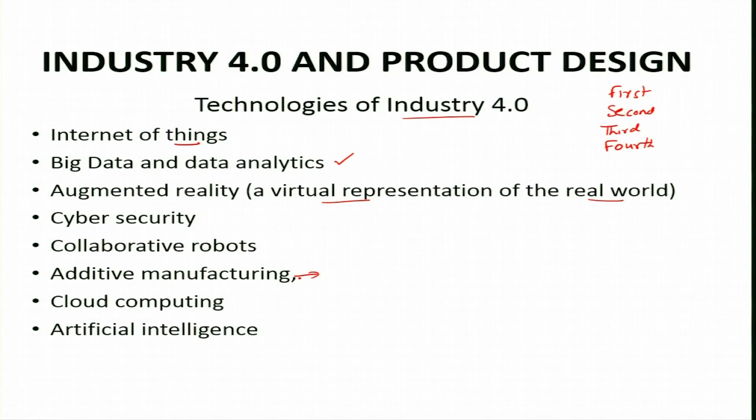So let us see this in brief. It is capable of decreasing the production cost because human interventions are not required, processes are going to be much faster, more accurate, better quality because of real time feedback given to the processes, and with the help of better analytics beyond the capabilities of human beings, the parameters are analyzed and utilized, and the logistic costs and quality management costs can also be reduced.

I can give you one example here. If you see in a steel plant, a blast furnace, where the iron ore is converted into steel - several input materials are fed into the furnace. These are natural resources, whether it is coke, coal, or iron ore, and they are not of consistent quality. Whereas the final steel we want to produce, we want a very good consistent quality steel. So what do we do?

In real time we measure the quality of these parameters, and then we can meter it also. We can change their composition, whether oxygen quantity or other ingredient quantities required, we can keep changing in a dynamic, real time manner, so that I can get a consistent steel quality. In this manner I can reduce the consumption of raw materials and get good consistent quality steel. So that is where production costs are reduced and quality management costs are also reduced, or better quality products can be produced with the help of various sensors, various analytics, etc.

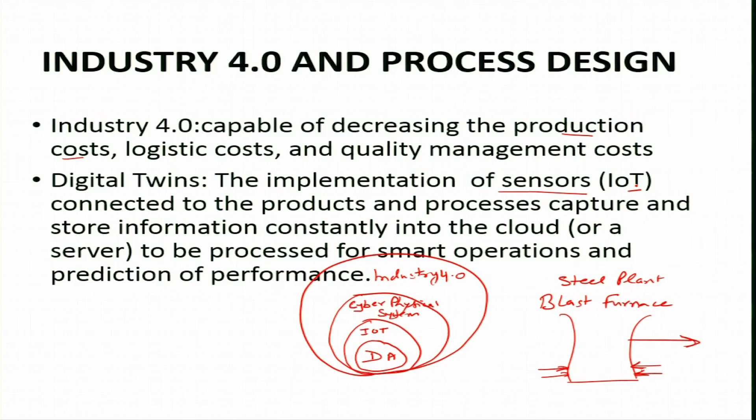Sensors and actuators in IoT - the major components are, as I said, things, and on these physical things we add sensors, so that in real time, data is collected about the performance, about its working, about its usage, etc. So a digital twin is the implementation of sensors connected to the product and processes, capturing and storing information constantly into the cloud or a server to be processed for smart operations without human intervention and prediction of performance.

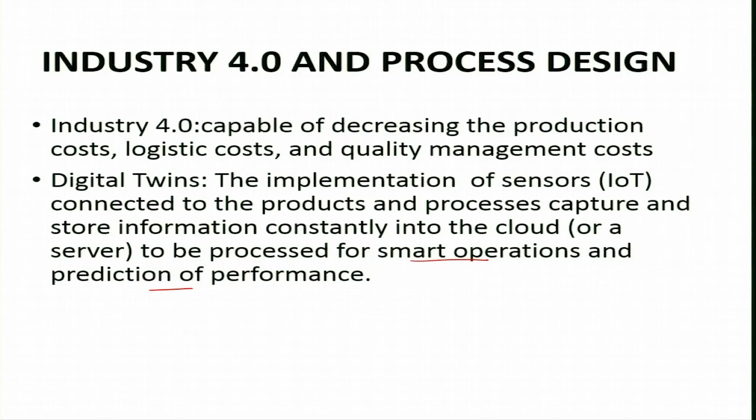So these are the things which are going to be there in our manufacturing, in designing of the products as well as in our processes. So we are going to have smart products, smart plants, and smart logistics - products performing without human intervention. Smart products means we are having so many things: smart mobiles, smart wristwatches, etc., and many more things which we will see in coming time, which do not require human intervention and give you very good performance.

So a smart product is a data processing object which has several interactive functions. A smart product combines the physical and software interface. The usage of the smart product is interactive and also requires some cognitive work by the user. You need some intellectual cognitive activities to fully utilize the smart applications, because you are not performing much, you are only using it. So whatsoever data, whatsoever information is coming, you should be able to assimilate that.

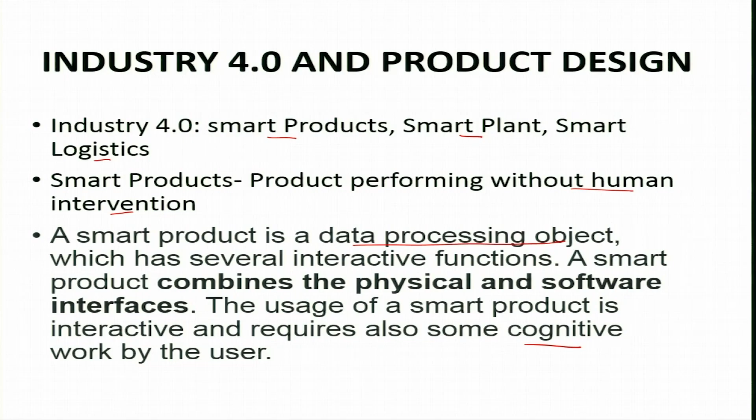Three features are very important when we talk about designing the product and processes. Autonomy - the smart products or smart processes will perform the task without the direct command of the users. They will do these activities independently, on their own, in an autonomous manner. So we have to see what type of input parameters I should give and what type of performance is expected. And we also have to keep in mind the safety of the equipment and safety of the society when we are talking about driverless cars, autonomous vehicles, unmanned aerial vehicles, etc.

We have to give very good development of these products, sensors, etc., so that accidents can be avoided or mishappenings can be avoided, and the performance is as per the expectations of the customers and users.

Second important dimension is connectivity, the connection of the product with the network, with the internet or with the cyberspace. We have to decide where to keep the sensors and how the data from the sensors is going to the cloud, what is the quality of the network, the bandwidth required, and other specifications required of the network.

Third is context awareness. We have to perceive and collect information from the surroundings also. When you are driving on a road without a driver, obviously you should be sensitive to the environment. The environmental data should also be collected, and the machine should have an awareness about the surroundings also. So in that context we have to see.

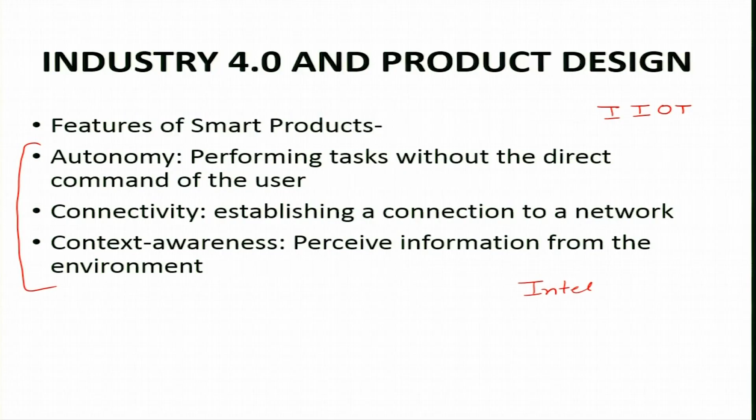So at the design stage, we now have to keep in mind, when we are designing the parts, whether it is a television, smart television, air conditioners, home appliances, or industrial products, we have to keep in mind these features, that now these technologies are going to play a very vital role in improving the performance.

Friends, in designing of products and processes, we have studied a few techniques. Value engineering is a very important technique which was developed during the Second World War. The idea here is how to improve the value of the product. Value engineering is not cost reduction. In cost reduction, we may compromise on the performance or on the functions also, whereas in value engineering we say how to achieve the same level of functions at a lower cost.

So we are not compromising on the quality, we are not compromising on the functional requirements of the product. Let us see some of the important steps in conducting a value engineering study, and at the end we will learn all the steps with the help of one example also, the example of a pencil, for which we are all aware. We understand each and every aspect of usage of the pencil as well as its manufacturing. It is such a simple product. So with the help of that we will understand the various steps of value engineering.

So friends, value engineering is an organized creative cost search technique. We search where the unnecessary cost is incurred. It is an organized technique having 8 phases, which we will study, called the value engineering job plan. It is a cost search technique for analyzing the functions.

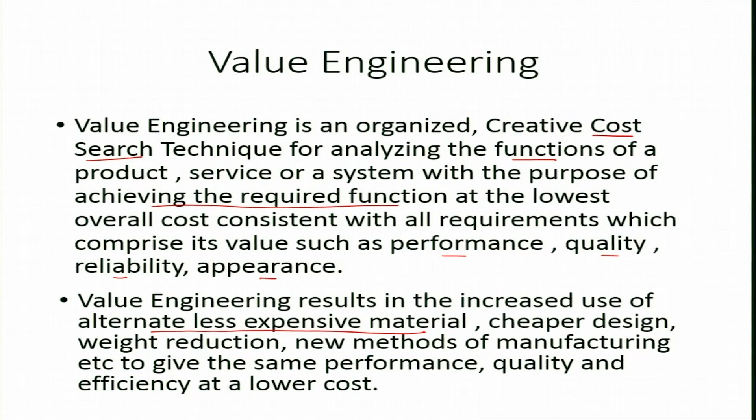Once the war was over, these value specialists were deployed in industry to improve the performance of the products and systems - to use alternate less expensive materials, cheaper designs, weight reduction, new methods of manufacturing etc., to give the same performance, quality and efficiency at a lower cost. Value engineering aims at promotion of value awareness and raising the level of professional competence and technological excellence.

Value is a function divided by cost, or worth. So we have to improve the function and we have to reduce the cost. To improve the value, we have to improve the function and reduce the cost. So the cardinal principle in value engineering is: challenge everything, challenge everything.

There is a difference between optimal and the best. In optimal, we say that within the given circumstances, within the given condition, what is best. But when you challenge everything, you are not assuming anything - you challenge, you can change everything. So in that case you get the best solutions.

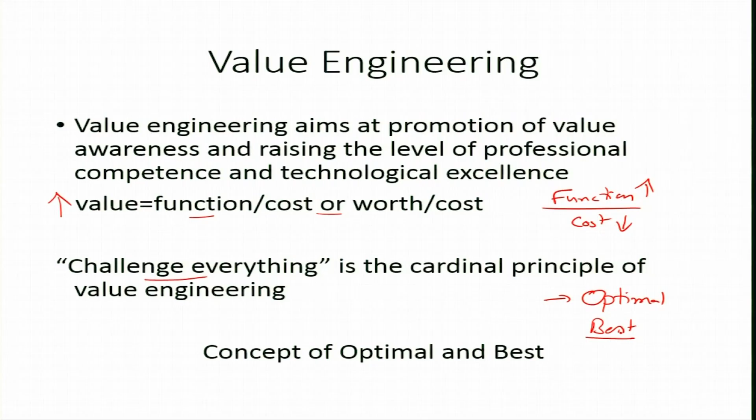So value engineering is cost avoidance instead of cost reduction. Value engineering means providing necessary functions and avoiding unnecessary functions. We see that if there is something which is not required by the customer, why have it in the product? So the first question is: why is this there in the product? If there is no function, if there is no answer why this is there...

If there is no answer, let us eliminate it. Then, maximizing value is not only achieved by reducing cost, but value can also be enhanced by improving the functions that are desired by the customer, at a relatively small increase in cost. As I said, at the productivity stage also, we are saying value equals function over cost.

So there are 4 ways by which we can increase the value. One is increasing the function at the same cost. Second is same function and reducing the cost. Third is increasing the function as well as reducing the cost. Fourth is a large increase in functional value with a small increase in cost. So in that manner we can do improvement in the value - all 4 kinds of things are applied in improving the value in value engineering cases.

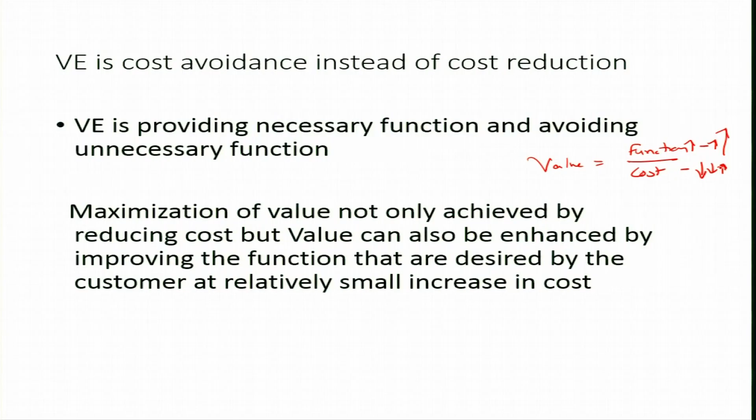So the objective is to identify the customer needs. All design steps start with customer needs, and customer needs are expressed in terms of function, not in terms of product. I will say that if I design a pencil, I will not say I have to design a pencil - I have to design a product which fulfills a function which is called 'make mark'. The function of the pencil is make mark. So I want to design a product which achieves this function of make mark, like that.

Similarly, for a tumbler, the idea is to hold liquid or hold material. So any product which can hold material, hold liquid, is a good product. So we have to see what is the basic function of a particular product.

So, find out the function and their cost. In a given product, we will see what functions this product is performing and at what cost these functions are achieved. Then identify the high cost functions - the functions which are having high cost but whose value is less - we identify that, and then we create the alternatives.

In the creative phase, we create the alternatives, so that for the high cost, low value function, we create alternatives. We will see this in examples also. And then we select the most valuable alternative for implementation, obviously after thorough analysis. And what are the benefits?

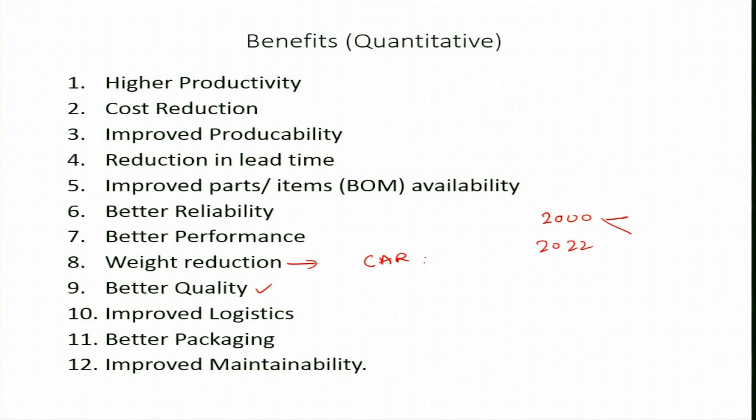Now the difference between value engineering and cost reduction. The conventional cost reduction program is more item oriented, tends to follow past practices, is analytical in approach, so there are no breakthrough changes—whatever you are doing, they try small changes within that itself. Ideas are convergent, cost visibility is part wise rather than function wise or process wise, and it is usually individual oriented work.

Whereas in value engineering, the approach is not item oriented but function oriented—we want to achieve the function, since the product is meant to fulfill a certain function. It applies an innovative approach rather than following trends; you don't accept anything existing, you challenge everything. So exercise maximum creativity, no holds barred. It's a divergent-convergent idea: first we try to diverge, creating as many ideas as possible, then we start converging them together to lead to the final answer, the final product.

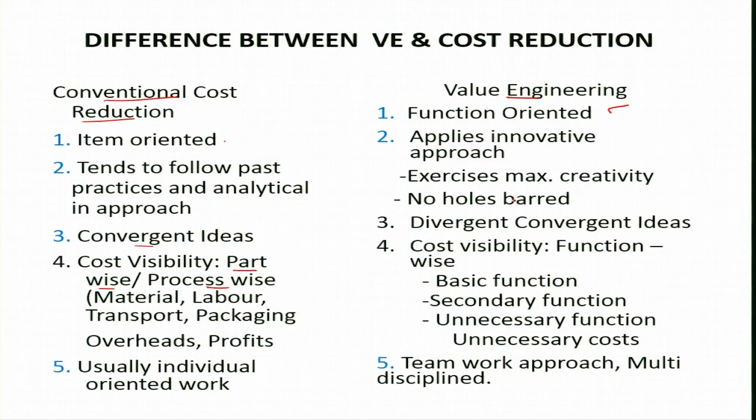Cost visibility is in the form of function—basic functions, primary functions, secondary functions, and unnecessary functions—and I try to see the unnecessary cost by identifying the unnecessary functions. It is a teamwork approach, a multidisciplinary approach, where team members come from several areas: marketing, research and development, product development, manufacturing, production, procurement, and costing people are also part of this team. Now let us see some small definitions.

Value is the lowest possible cost of a product or service performing a useful and essential function with required quality and reliability. Value is defined as needed performance at minimum cost. So value is nothing but...

what we say in our daily parlance—the value proposition for me. What is the value proposition for me for a particular product or offer? How it is going to perform for me and at what cost I am going to get that—that is called value proposition. So what is the value for me of a given idea, a given product, why should I have it?

This value has several types; only 3 are listed here. One is use value—what makes it work. Esteem value—what makes it sell, just like jewelry or ornaments have more esteem value and less use value, whereas turbines, fans, etc. have more use value and less esteem value. And then there is exchange value—at what price one can trade for it.

And then the second important thing which we have to see is what is the worth of that item for me. The monetary equivalent for every type of resource being expended or expected in order to achieve a single function or a group of functions together, making up a project designed to satisfy the specific needs of the customer. So worth is what is the money equivalent to that? What is the worth of that to me?

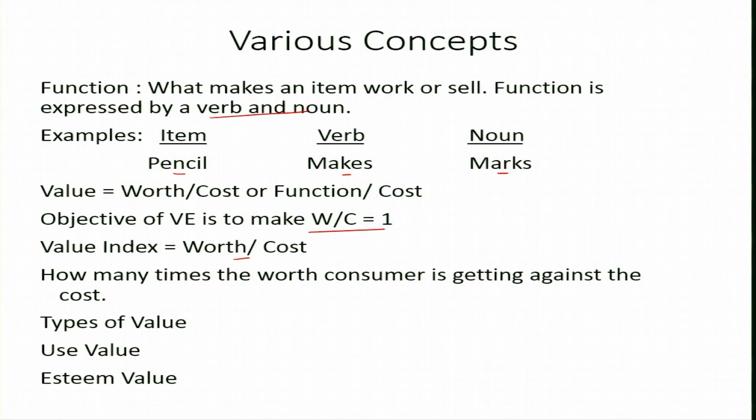What happens if you apply it at a later stage, the cost of implementation is high and the benefits are also very less, because at the operation stage so many changes you need to make, already you have committed something. So the cost of change is very high and there may be several things which you may not be able to change to get the full advantage of value engineering.

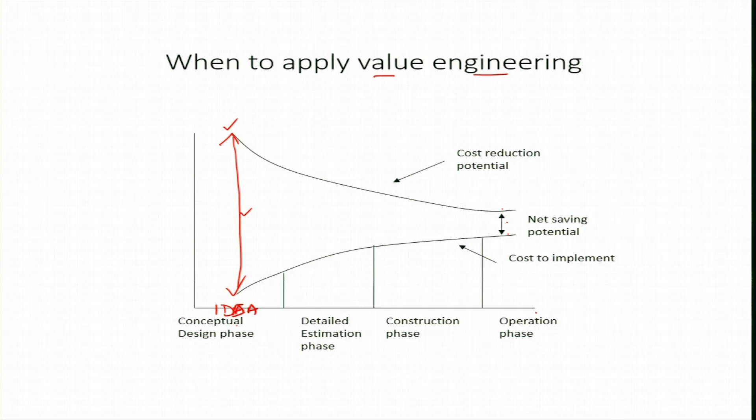As I said, it was developed during the Second World War. Due to scarcity of raw materials, value analysis teams were formed to search for alternate ways to achieve a given purpose or function. There are alternate names: value analysis, value engineering, value management, etc.

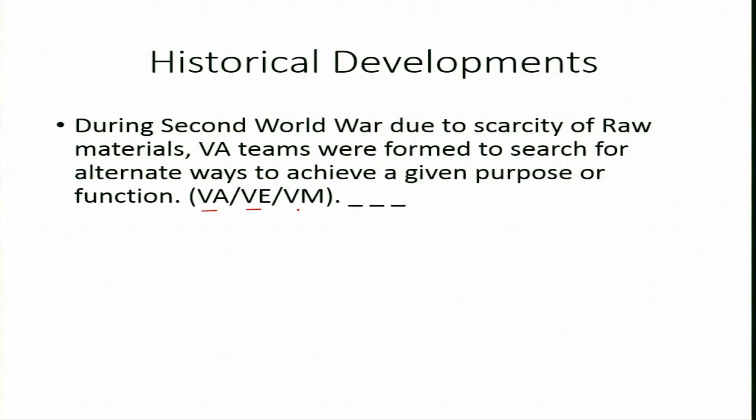It uses a systematic job plan. The job plan outlines the specific steps, 8 steps are there, to effectively analyze a product or service in order to develop the maximum number of alternatives to achieve the product's or service's required functions.

The phases: orientation phase, information phase, function phase, we will see them in detail in coming slides. Creativity phase, analytical phase, whatever we have created, we analyze that, evaluate the alternatives and then we recommend to the management, recommend to the seniors, and then implementation. So this way 8 steps are involved in value engineering. Let us see one by one.

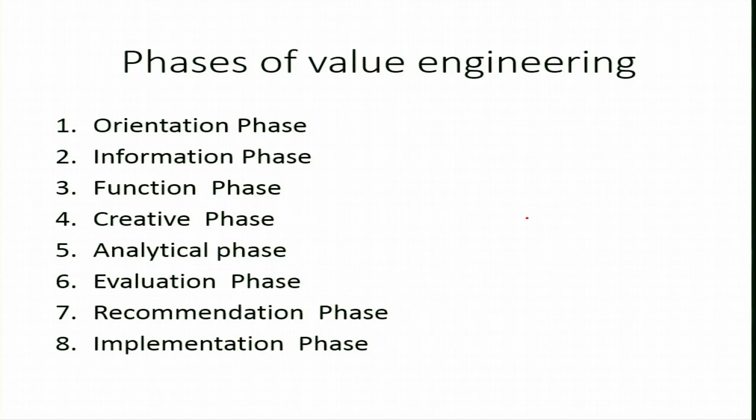First step is selection of the product or a project. Which product, which component, which part, which service, which process I should select. What is to be studied?

Submit ideas for the project. Here also you can try to find out what are the various things, generate the various projects which can be implemented, which can be studied, and out of that evaluate for potential benefit. The projects which are having high potential benefits, that may be selected, where the return on investment is high or time to implement the results is less, or there may be some other benefit.

It is a hazardous work where it may be creating environmental damages, or it can affect the safety of the worker, something like that. So that can be selected as a project. Other than economic consideration can be there in selecting the project.

Here in the orientation phase, we are also appointing the team, allocating resources, and overcoming roadblocks. There may be several roadblocks. People may say, we are using it for so many years, why change it? It is performing very well, why change it? Or there may be obstacles like, we do not have the necessary competency or resources to do that.

So we have to create the atmosphere within the organization so that there is acceptability of the project, and then set the goals, what you want to achieve, set the milestones in between, and the total project duration in which you want to achieve that. Establish the priorities and get the project approval and start it. So this is part of the orientation phase, where we are preparing the ground for systematically taking up the project.

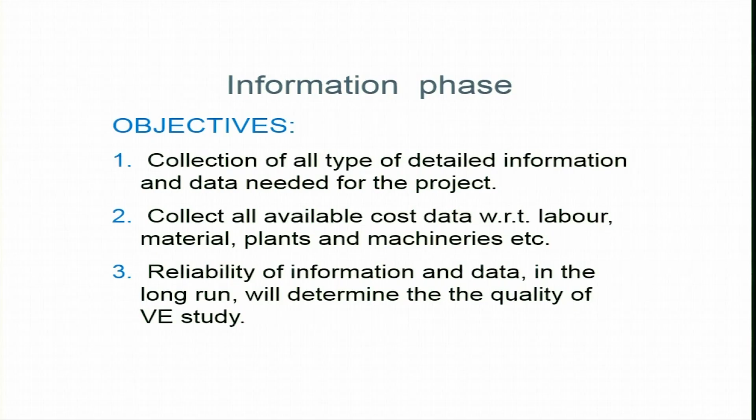We should ask key questions while collecting the data. Who made the specifications drawing and when? How old is this specification, what was the team structure, what were the constraints at that time, was it ever reviewed and revised, if so when, are the specified materials easy to get or are they specially made for us, like special material versus standard material, were alternate materials used, is there one supplier for the item?

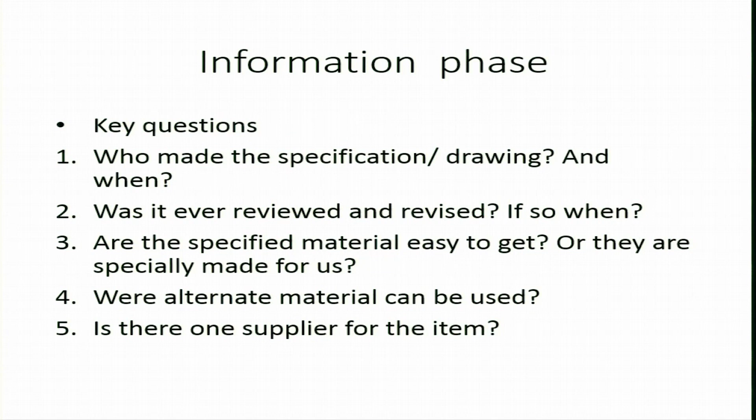So some of the questions to explore while collecting information. Were complaints ever received regarding the item? What is the history of the item? How many complaints, warranty returns, internal failures, external failures, what type of quality control checks are required.

Are the costs based on recent estimates? You may have a costing done 5 years back or 2 years back, so you should have the cost data of recent periods. Are there any hidden costs? Have we considered everybody who has anything to do with the product, so that each and every aspect, each and every cost is captured?

Which aspect of the project, in your opinion, can be greatly improved? The product may be like cars, etc. So there may be several aspects. Which aspect should be considered? There are several types of hidden costs in any system.

Certain costs are visible from outside, certain costs are not visible, like losing a customer is a hidden cost of poor quality, or there may be delays in service, or expediting with high logistic cost which may not be visible to you. So these are called hidden costs related to the product.

Then the third phase, which is the heart of value engineering, is the function phase. Function definition and analysis is the heart of the value methodology. It is the primary activity that separates value methodology from all other improvement practices. There are several such approaches available - operation research, method study, quality circles - which help in improvement. But the unique aspect of value engineering is its function approach, which makes it different from others.

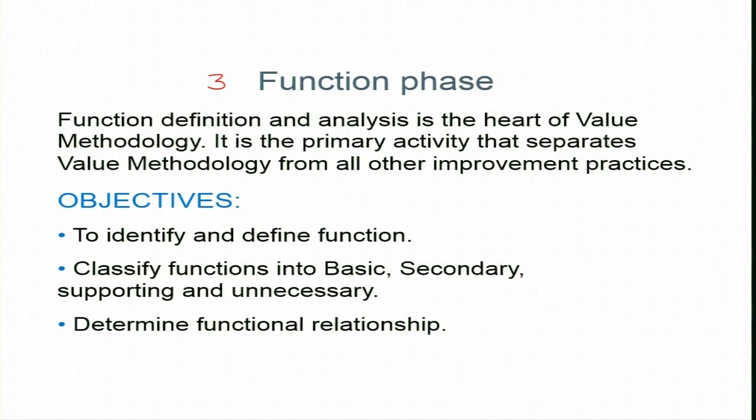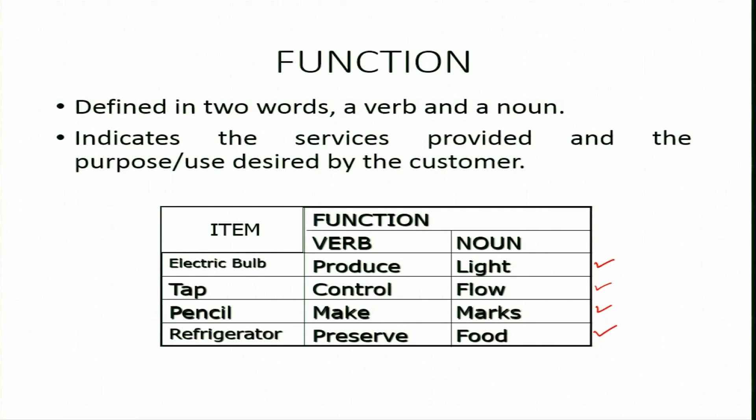So define the function with the help of two words: electric bulb - produce light; tap - control flow; pencil - make mark; refrigerator - preserve food. In that manner, any product we can define with the help of two words, a verb and a noun. Perform a cost-worth analysis of each function.

What is the cost of achieving that function, and identify the unnecessary cost. Determine value opportunity cost of each function, determine overall value opportunity cost, and determine the overall worth of the project. We will see, when doing an example of a pencil, all these steps we are going to follow very religiously there.

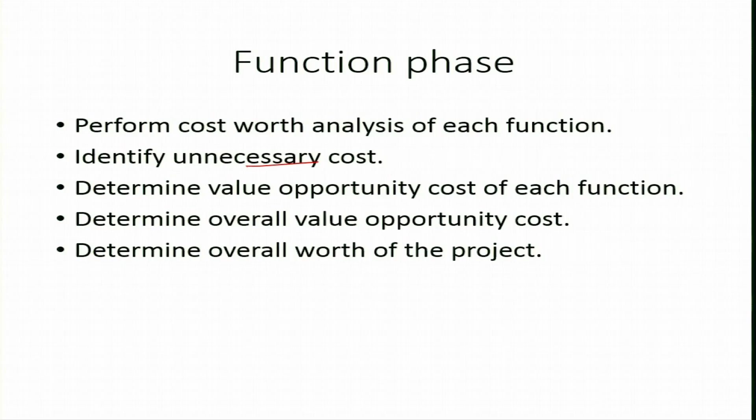So, key questions are: what does it do? If we find that there is no purpose of this, we may totally eliminate that. What must it do? So, creating the right approach, right things which is required.

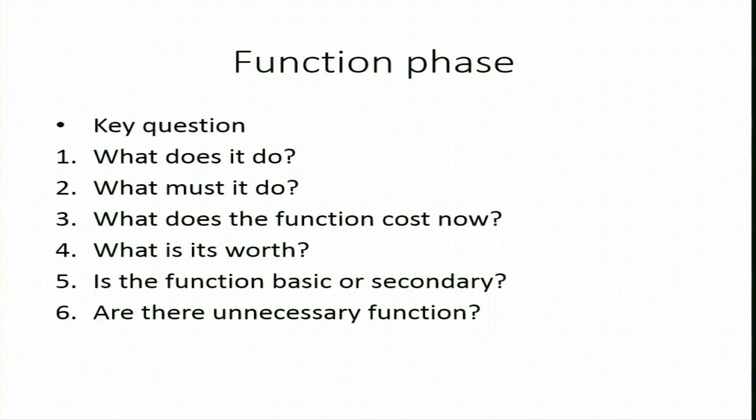What does the function cost now? What is its worth? Is the function basic or secondary? Are there unnecessary functions? So, we try to identify that. So, we classify the functions as basic functions, secondary functions, supporting functions, and unnecessary functions.

Like in LCD projector, there may be unnecessary heat created by the bulb. So, that is an unnecessary function, dissipating the heat. All such things, parts, etc., which you are using to dissipate the heat is an unnecessary function.

Secondary function may be because of certain design features, or maybe certain secondary requirements of the customer also. Supporting function can also be due to some secondary requirements of the function of the user also.

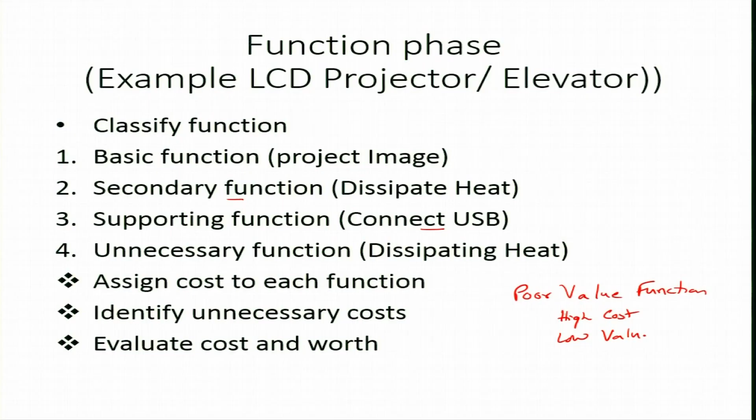Then, as I said earlier, the end of the function phase is to identify poor value functions, the functions which are having high cost and low value. So, they are called poor value functions. And then in the creativity phase, we generate the alternatives for this poor value functions.

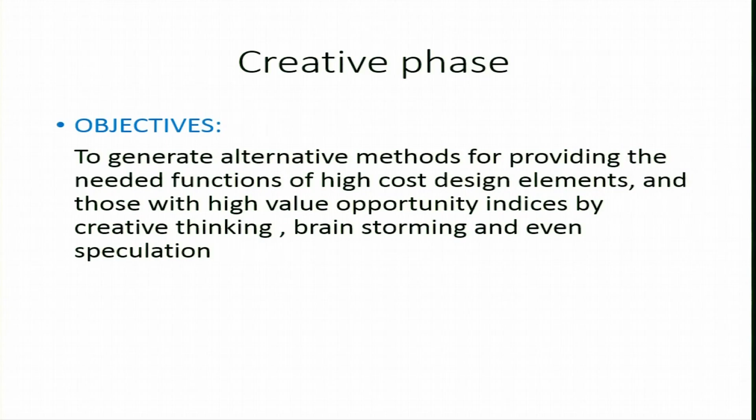By using several idea generation techniques, we generate alternative methods for providing the needed functions of high cost design elements and those with high value opportunity indices by creative thinking, brainstorming and even speculation. So, such kind of approaches can be used in the creativity phase.

So, key question is what else would accomplish the job required function, what else can be done to achieve the required function. This involves generating a large quantity of ideas. We have seen that we should generate large ideas because in screening and in analysis we found that several ideas died out and were not able to pass the test of scrutiny. So, generate large quantity of ideas for alternate means of accomplishing the basic function.

Challenge everything is the cardinal principle. There is always a better method of doing it. These are some tips for creating when our creativity is high.

Select the right time of the day when our creativity is very high. State the problem carefully and clearly. If you are not given the problem definition, articulate the problem in a proper manner, people may get different ideas and you may get ideas which are not worthwhile. Organize your approach and avoid generalities.

Use idea banks and idea museums also. There are certain ways, certain things already in archive. Build up your idea resources. Build big ideas from little ones. Set a quota for ideas.

Try the input output scheme. Talk it over and use innovative techniques. Use information from only the best source. Identify and overcome the roadblocks.

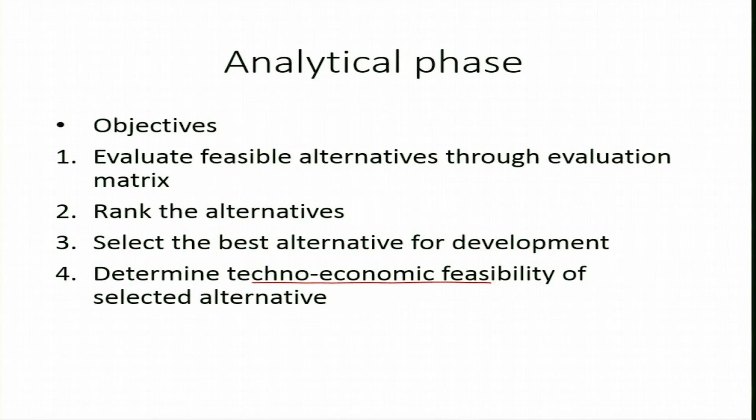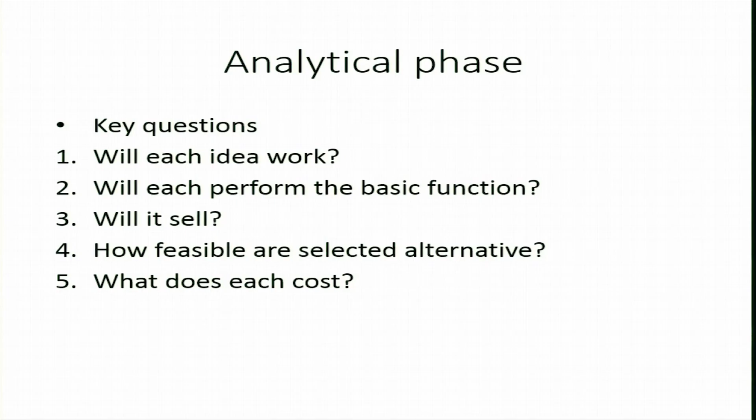Key question: will each idea work? Will each perform the basic function? Will it sell? How feasible are selected alternatives? What does each cost?

It is from this phase onward that the ideas generated are subjected to screening with function, performance, reliability, etc. The different ideas may be refined, combined, divided, modified, amplified, dropped to arrive at a final set of alternatives which will accomplish the function.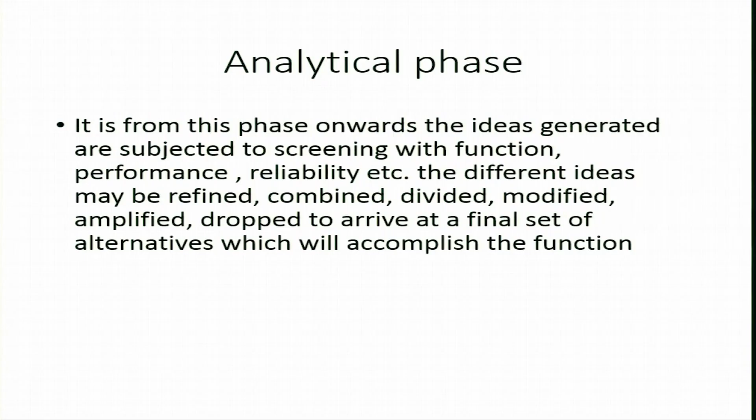Then come the evaluation phase. Put the recommended alternative vis-a-vis cost and benefits before the decision makers in such convincing terms that they will accept the recommendation, to make recommendation for the specific action and to suggest an implementation plan of action.

Key question: will the customer needs be satisfied? Will it meet all requirements? Who has to improve it? What are the implementation problems and what are the costs associated with that?

Few more questions. What are the savings potential if it works? Which is the least expensive? Will it be relatively difficult or easy to make the changes? Is there time to implement? What are the chances of

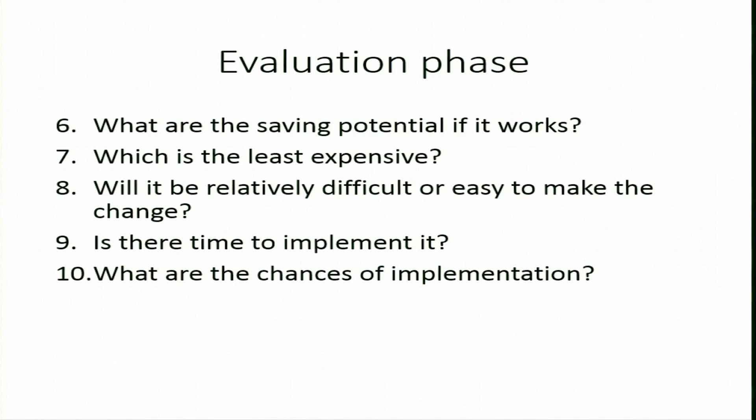implementation? Then come the recommendation phase. We recommend our proposal to the top management and we also tell them what are the cost savings, what are the resources required, how it is going to be beneficial for the organization.

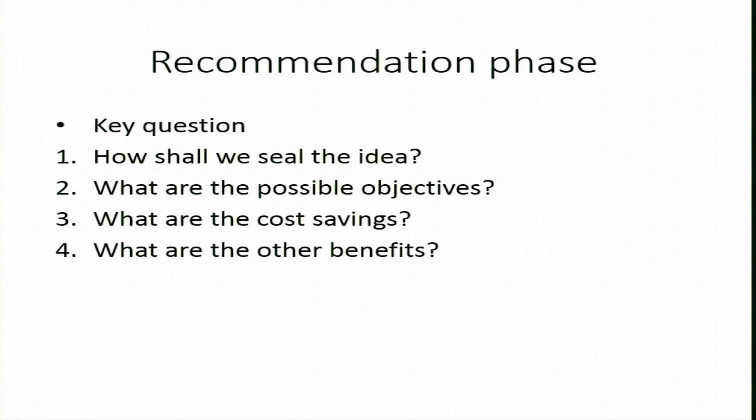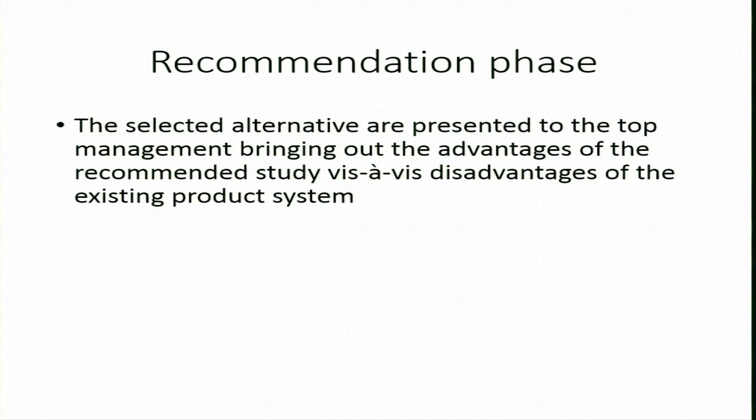And the selected alternatives are presented to the top management, bringing out the advantages of recommended study vis-a-vis disadvantages of the existing product system. And then comes the implementation phase to assure that approved proposals are quickly and properly translated into actions to achieve the savings of the product improvement that were assured. Various phases in this are implementation phase, audit phase, extension phase.

Key question: has the recommendation been fully implemented? What are the problems? What are the savings and advantages? This is the feedback from the implementation. How and who will monitor the progress? Who are responsible for implementation within the time preset?

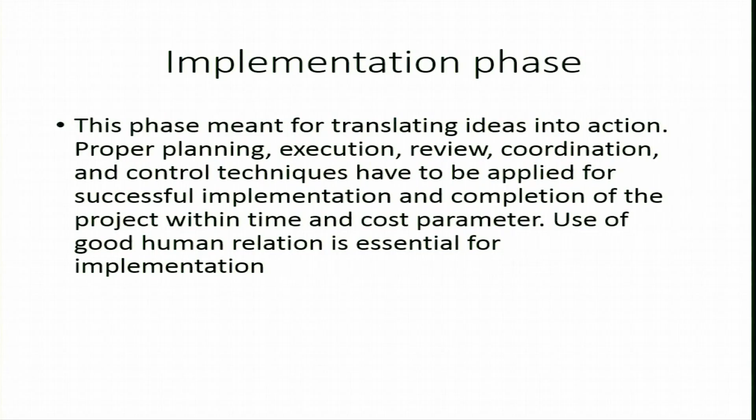This phase is meant for translating ideas into actions. Proper planning, execution, review, coordination and control techniques have to be applied for successful implementation and completion of the project within the time and cost parameters. Use of good human relations is essential for implementation.

Now let us come to the example, how to implement these 8 phases with the help of an example: pencil. Orientation phase, selection of the project.

Why in a classroom setup have we selected pencil as a case study? Because it is a very common item, everyone is familiar with it. An assorted audience from different branches can be there. The product structure and manufacturing process is simple and transparent. Everyone can understand how a pencil is manufactured, and cost visibility is also there.

Formation of the team: all the participants of the course or program can be participants, or we can form teams of 5 to 7 students or participants.

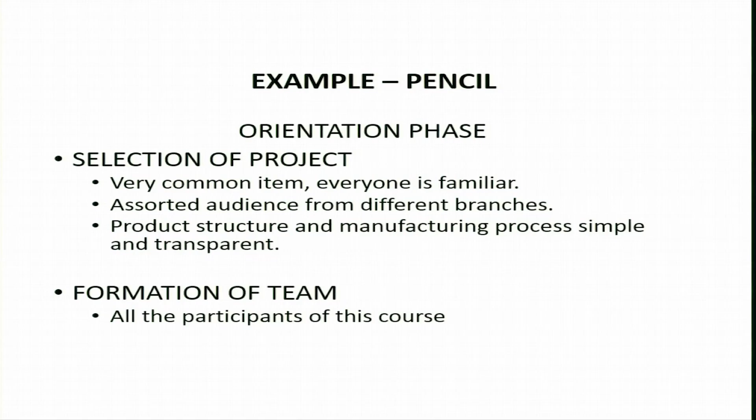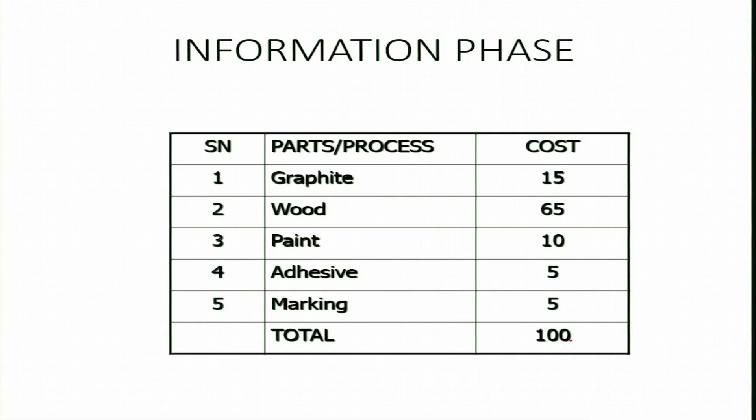Now we collect the information, the second phase of our value engineering job plan. For a pencil, let us say the pencil is of 1 rupee, or 100% cost, if we consider. Out of that, 15% cost or 15 paisa is of graphite, 65% cost is of wood, 10% cost is of paint, 5% cost is of adhesive, and 5% cost is of marking. This is the approximate breakup of the total cost we can consider.

Now let us see the functions of these materials used in each part and process. The graphite, which we popularly call lead because of its black color, is used in the pencil. The function of the graphite is Function A: make marks.

Wood is used to protect the lead, the graphite, and also provide grip. With the help of wood we get grip while writing, and the lead, being fragile, is also protected in the process.

The paint provides smoothness, so it does not injure our finger, and it also protects the wood. If the wood gets wet, it may get damaged or spoil the pencil. So the paint protects the wood as well as provides smoothness so we can easily grip it. We can also write another function: provide grip.

Adhesive provides bonding. The pencil's wooden part is made in two halves, and by keeping the circular lead in between, with the help of adhesive, it is bonded together.

Then there is marking: something written on the pencil like HB, 2H, 3H, the manufacturer's name and other things, to convey the message that this pencil is made by a particular company and is of a certain hardness - HB, 2H, 4H, or 2B - required for different applications.

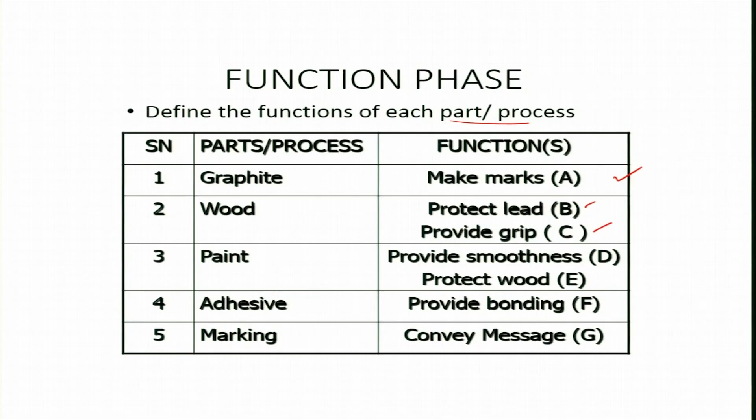Now, the next step is to compare the functions, to see which function is the most important out of the 7 functions we have identified: A, B, C, D, E, F, and G.

Now we compare these with the help of a pairwise comparison technique to see which function is most important. Here I compare A with B: whether make marks is more important, or function B, protect lead. For a pencil, is make mark more important, or protect lead more important? Obviously, make mark is more important.

So like this, I compare in a pairwise manner and then count the score. Wherever A is coming, I count the score: 3 plus 3 is 6, plus 3 is 9, 12, 15, and 7 - there's a small mistake here, let us make this A2, so the score is 17. Then for B, let us count it: 2, 4, 6, 7, 3, 10. For C the score is 1 plus 2, which is 3, wherever C is coming I am counting that.

For D the score is 2, for E the score is 2 4 plus 3 7, for F the score is 3 plus 2 5 plus 3 6 8 and 3 11, and for G my score is 0, nowhere G is coming. Okay, so like this.

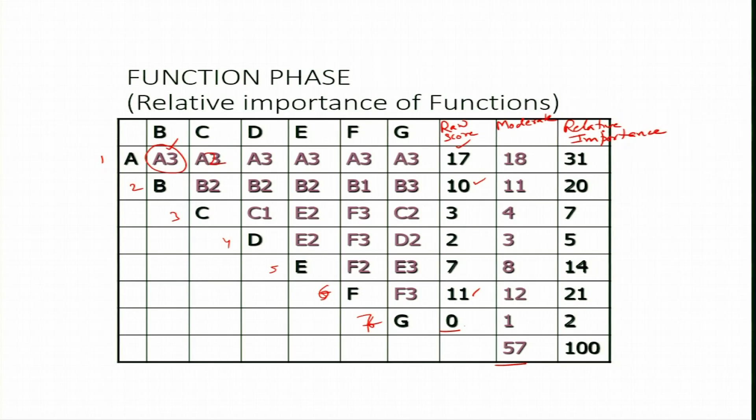Now we are having a relative cost of the various parts of the pencil and the relative importance of the various functions, and from this we will develop the function cost matrix - the function value cost matrix. Function A, make marks, the value importance is 31%, and it is coming basically from the graphite, and the cost of the graphite is 15%.

Then function B, protect lead, its importance is 20%, but its cost is 30. Total cost of the wood is 65%, which is broken into two functions: protect lead 30% and provide grip 35%. Provide grip has an importance of only 7%.

Provide smoothness: 5% is the importance, 5% is the cost. Protect wood: 14% is the importance, and 5% is the paint cost. Provide bonding, very important: 21% is the importance and 5% is the cost. Convey message: 2% is the importance and 5% is the cost.

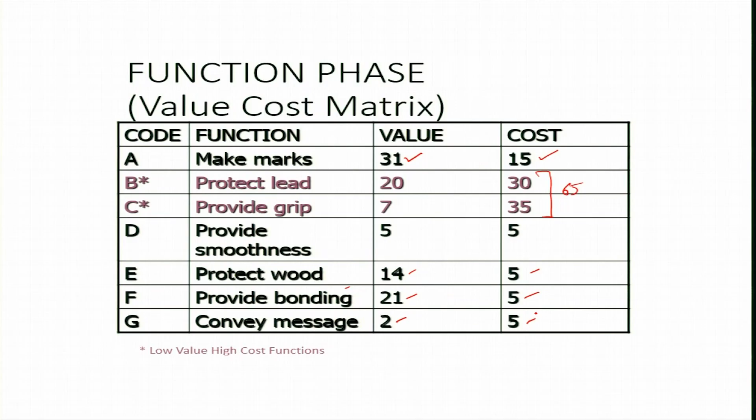From this we found that these two functions are poor value functions. The value is 20% where the cost is 30%; value importance is 7%, the cost is 35%. So these become the candidates for our next phase, that is the creativity phase.

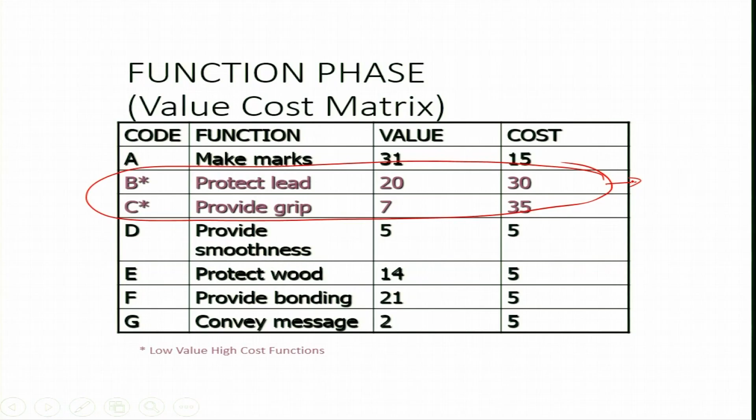And so in the creativity phase we generate ideas for alternative materials, alternative things for achieving these two functions, that is providing grip and protecting the lead. And you will find in the market the various alternatives which are coming for the pencil.

There is no change in the graphite, but all the alternatives - whether it is a clutch pencil, a magic pencil, or any type of pencil - the change is with respect to achieving these two functions, that is grip, and alternatives to wood with the help of several other ways that you will find in the market. So in this phase ideas are generated to achieve the functions protect lead and provide grip.

Then we generate the alternatives, and let us say we have generated 5 alternatives here in the creativity phase. One is the clutch pencil, second is the magic pencil - the lead is of diameter around 10 mm so that you get the grip. Then synthetic pencil, where rather than wood we use synthetic material. Then there is a bonsai pencil, where small units are there which you can keep on inserting from the back - you use it, consume it, and insert; there is no sharpening required, and plastic barrel is there. And then there is the wood pencil, the existing pencil.

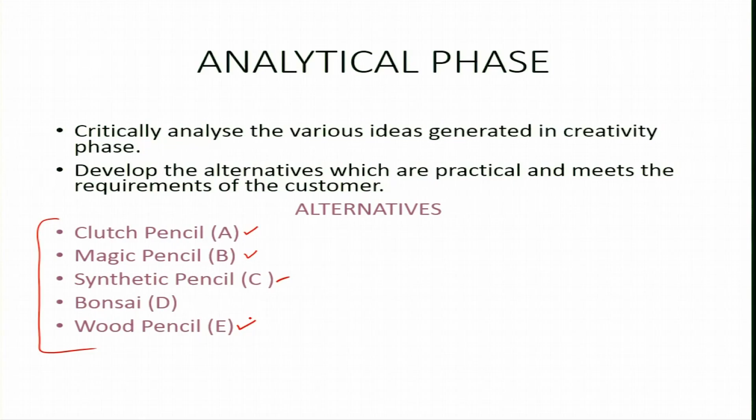So 5 alternatives are created, and now we are analyzing, and from the analysis we are able to generate these 5 alternatives. Now evaluate these 5 alternatives to see which one is the best. And for evaluation we use multi criteria.

Multi criteria can be cost, user convenience, or other parameters - we will see in the next slide. And then we decide their weightages, how important a particular criteria is, by using the pair comparison, just like we compare the functions. And then we will evaluate the alternatives and select the best alternative.

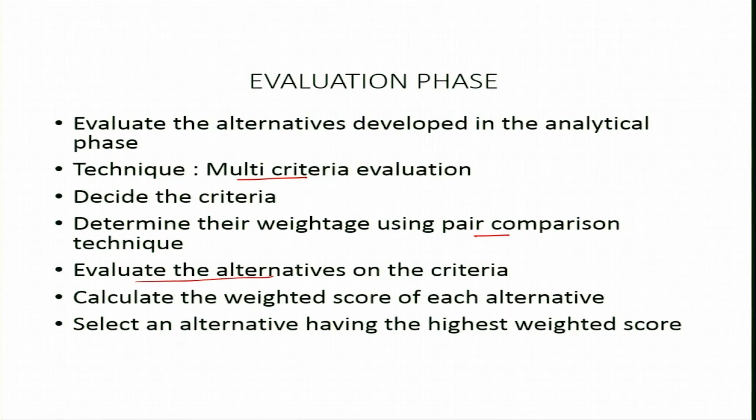So this is my multi criteria evaluation matrix. Let us say 50% importance I am giving to cost, 30% importance I am giving to grip, and 20% importance I am giving to ease of sharpening. And then these are the 5 alternatives which I am having. E is our existing traditional pencil of wood.

A is written here - A is our clutch pencil, B is our magic pencil, C is synthetic pencil, D is bonsai. You will find clutch pencil and bonsai do not require any sharpening.

So from that perspective you will find A and D are very high on the score, because they do not require any sharpening.

On the other hand, from the cost perspective, from the life cycle cost perspective, you are finding that clutch pencil is very less expensive over its life cycle.

The pencil may be costing you 50 or 100 rupees, but the cost of the lead is very less. So you can keep refilling it and use it for a longer period.

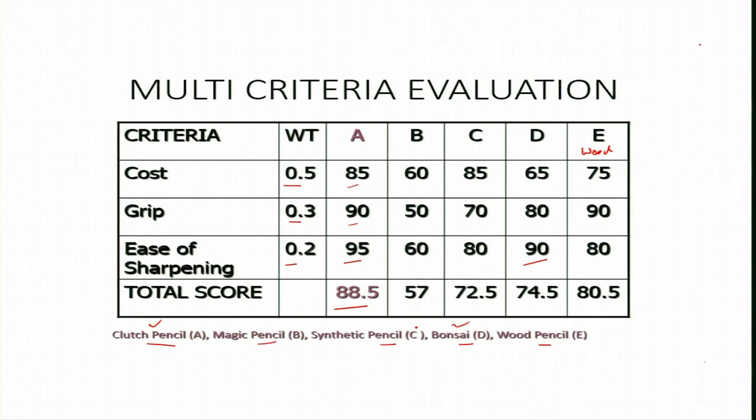Similarly we can compare this, and based on this comparison we found that clutch pencil is the most economical, better based on these three criteria, and I can select that. This is a classroom kind of exercise, and then you can implement that.

So giving you an overview as concluding marks, value management encompasses the following areas: value engineering, life cycle costing, project management also - because we have to implement also - creativity, creative problem solving, teamwork, and management of change.

Change is also required, so we have to keep in mind that when we are taking up a value engineering project, we should focus on life cycle costing, project management, and management of change. Management of change may have several human dimensions also, along with the technological dimension.

So in this session we have talked about two important aspects: one is Industry 4.0 and its application in product design and process design.

The second important topic which we have covered is value engineering, its applications in product design. Value engineering is based on the function approach - we see the functions of the product, and based on the functions we try to generate alternatives by identifying the poor value function.

which is having high cost and low importance. So based on that we develop the alternative and select the best alternative and implement that. So thank you so much.